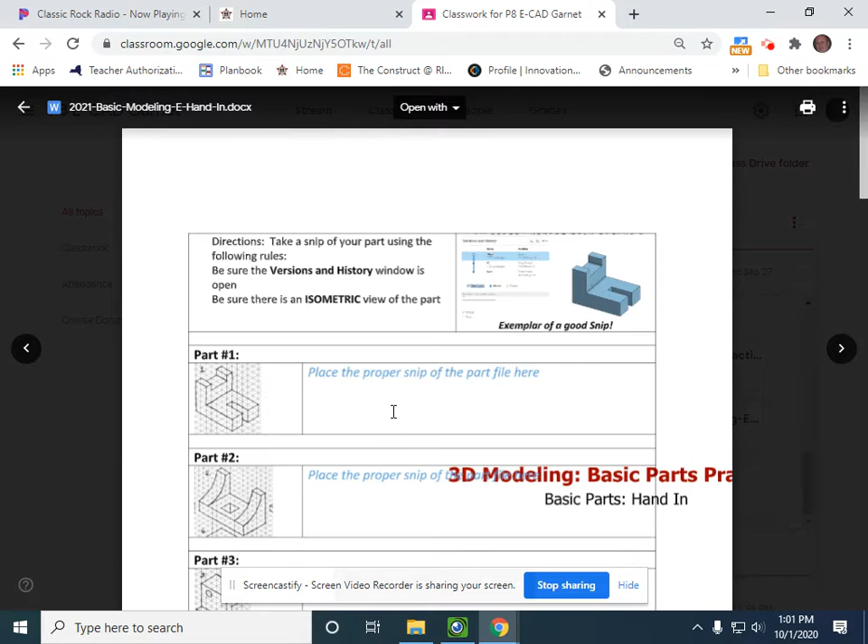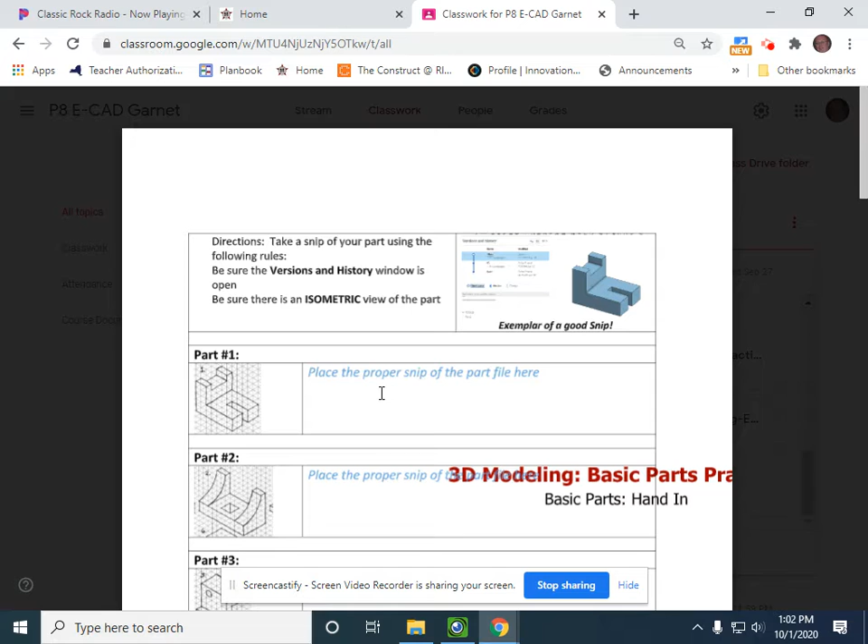So you're going to use this along with this document right here to actually turn this in. And the big thing here is that when you put in the snip of your items, that you turn on this versions history report thing up here, and you have a nice big picture of the part beside it, okay? In the video, I actually talk about how you go about doing that snip on a Chromebook. Basically, it's Control Shift and then the switching key, they call it. So that's the heart of that.

Now, the first big project is right here. Let me just make sure I get this right. Okay, this is the skid steer project, and you're going to complete this, and everything is going to be due - in other words, the assembled part is going to be due on the 15th of October, 10/15, okay? So I'm going to open this PDF up, and I'll scroll down here.

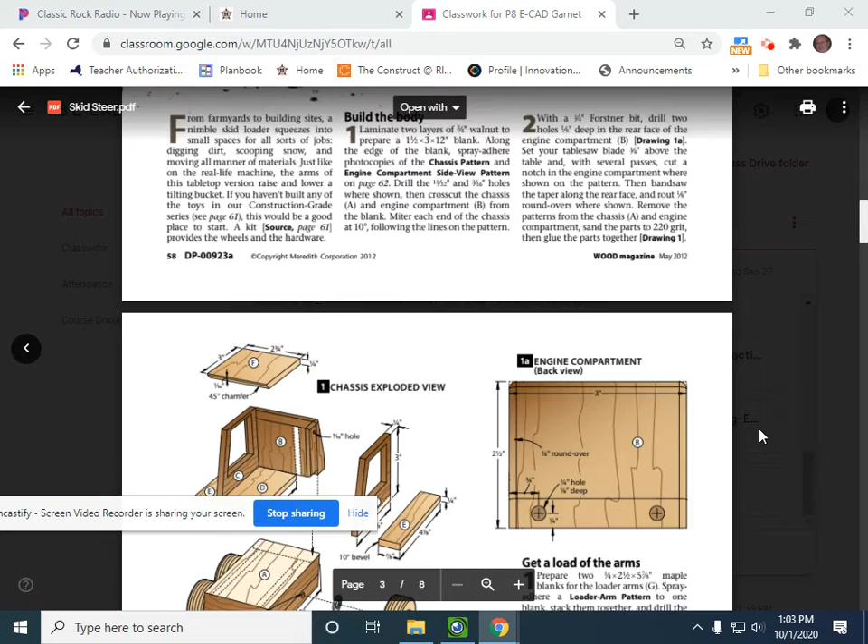And that is one of the actual wooden made, built skid steers. All right, so now I'm going to slide down here in this, and you're going to see that it'll show you how the skid steer goes together. They have parts with letters and all this good stuff. They even have some dimensions on here.

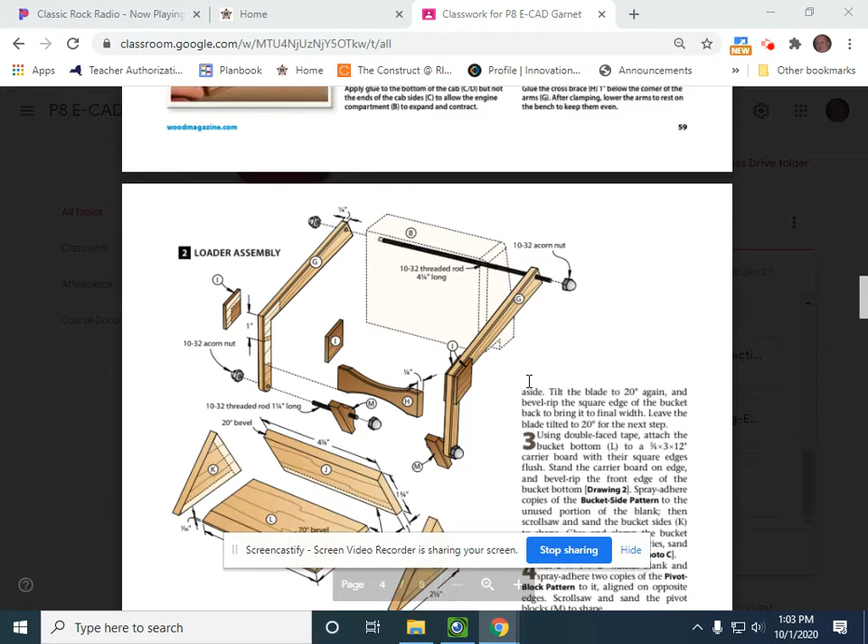Like these are probably, I think these are the holes for the axle. And they give you some dimensions, like it's a 1/4 inch hole at 1/4 of an inch deep. And in the text here, what you'll see is it talks about actually purchasing the hardware kit, which includes the wheels and like the things like acorn nuts and this threaded rod.

Now in SolidWorks, I know we can download acorn nuts and the solid rod and stuff like that. I am going to do some research, as a matter of fact I'll do it today to see if we can actually download those things. I have a resource that we were using for SolidWorks, and it worked for Inventor too, but I don't know if it'll work for Onshape.

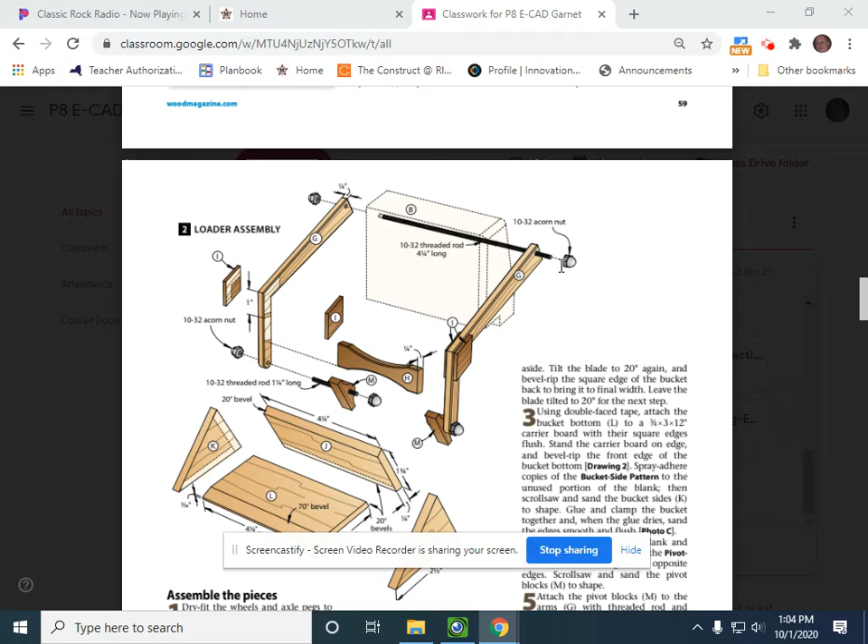Anyways, things like the wheels, there's no drawing for that. Okay, so you're the designer. You're going to actually create that wheel itself. All right, and I can't tell you it's wrong, right? Because there's no drawing of it. So it's your creativity, I guess, is starting to be important.

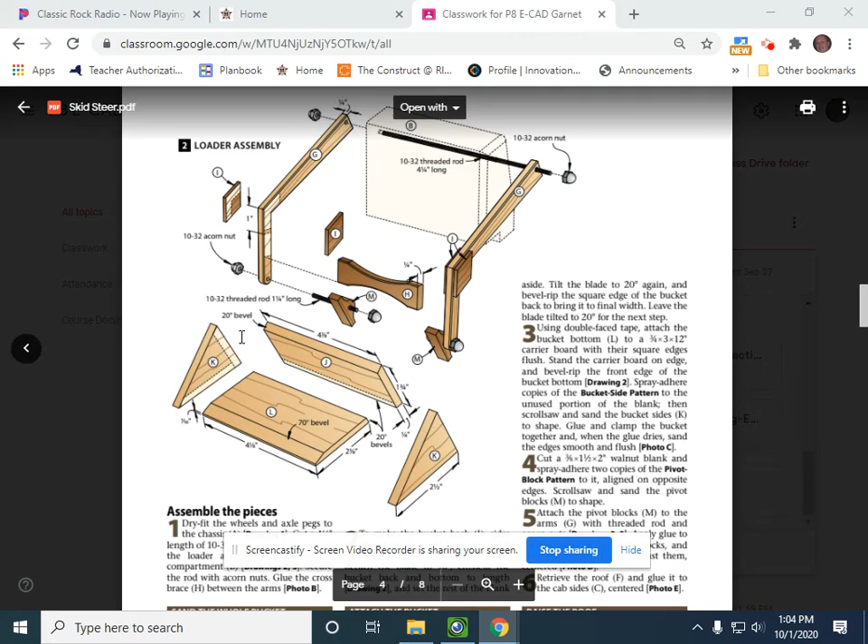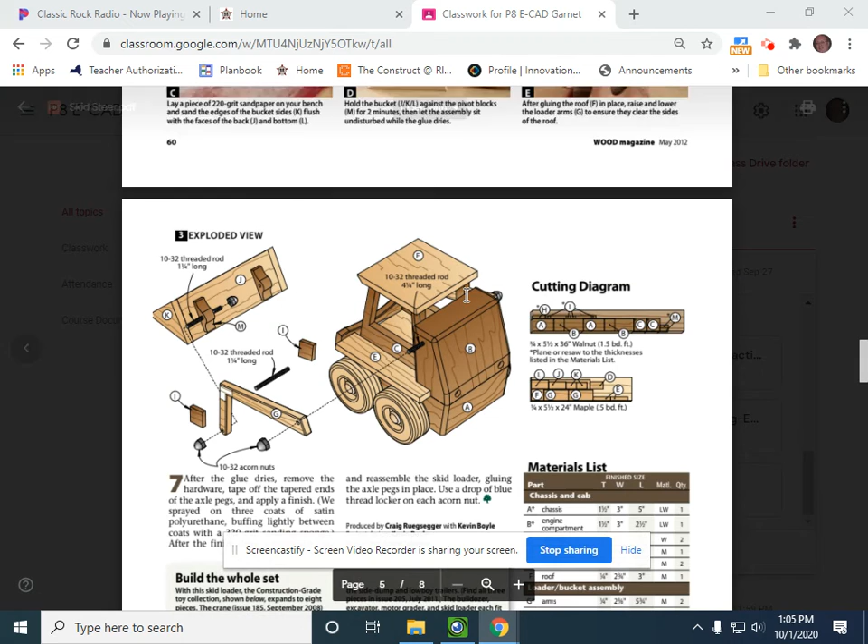They're showing you how this all goes together, and such as that. So this is a complex little part, right? Here's the parts list right here, A through M, and here's where everything starts getting all pieced together.

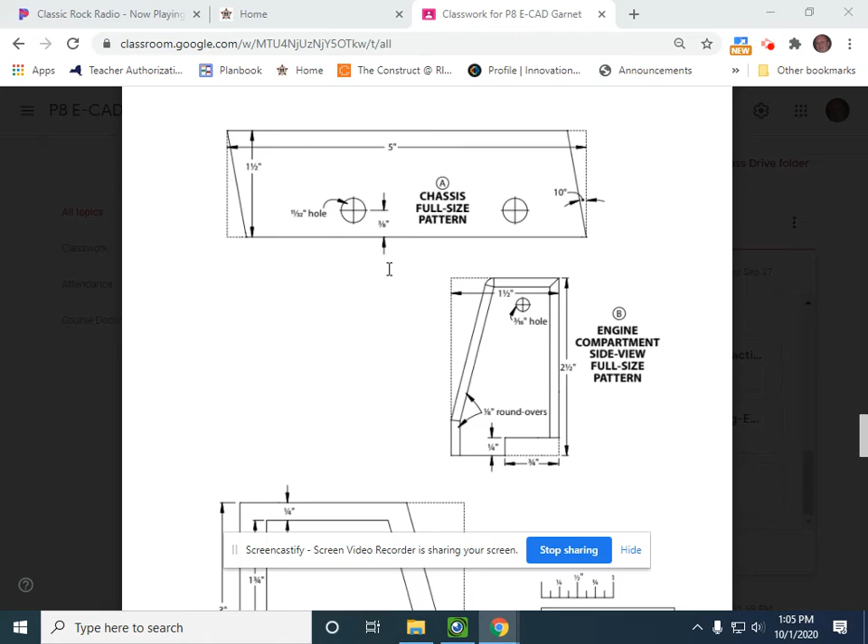So when you get down here, this is where there are more detailed drawings of the different components of the loader, the engine compartment, the chassis. Go down, here's the cab side, such as that.

And what I will tell you is from experience in having students do this project in prior years, I do know that there are missing dimensions. Quite honestly, if you ask me what the dimensions are, I don't know. So if I don't know, I can't grade you on it, right? So you are the designer. You're the one that needs to figure that out, okay?

So it shouldn't be too bad. Once you get into this, I mean, it looks really kind of terrible, I guess. I don't know what you think, but anyways, once you get into this, it won't be too awful bad. You'll zip right through it. Besides, who doesn't want a skid steer, right?

Okay, do you got any questions there, Charles?

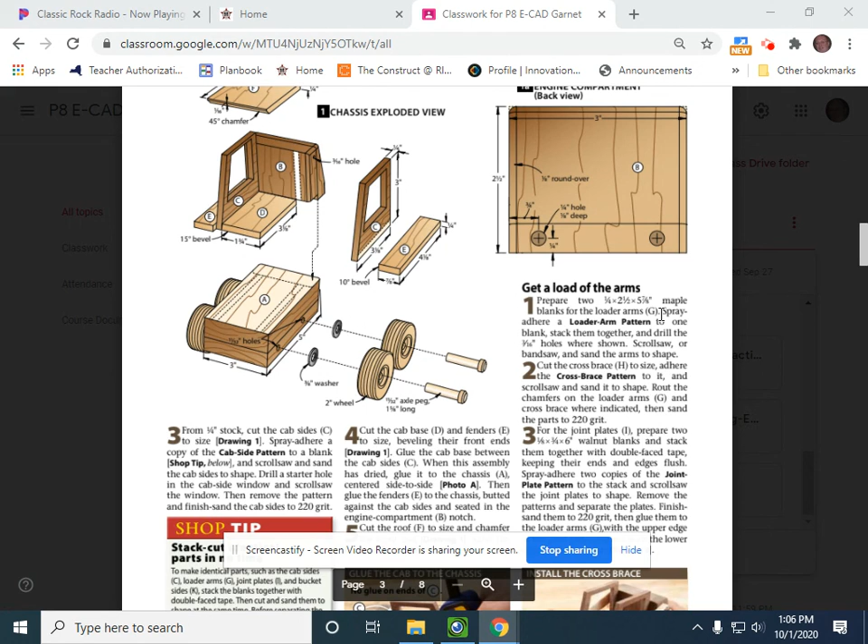You know what? If you want to do tracks, okay, I don't have a problem with that. Okay, all right, cool.